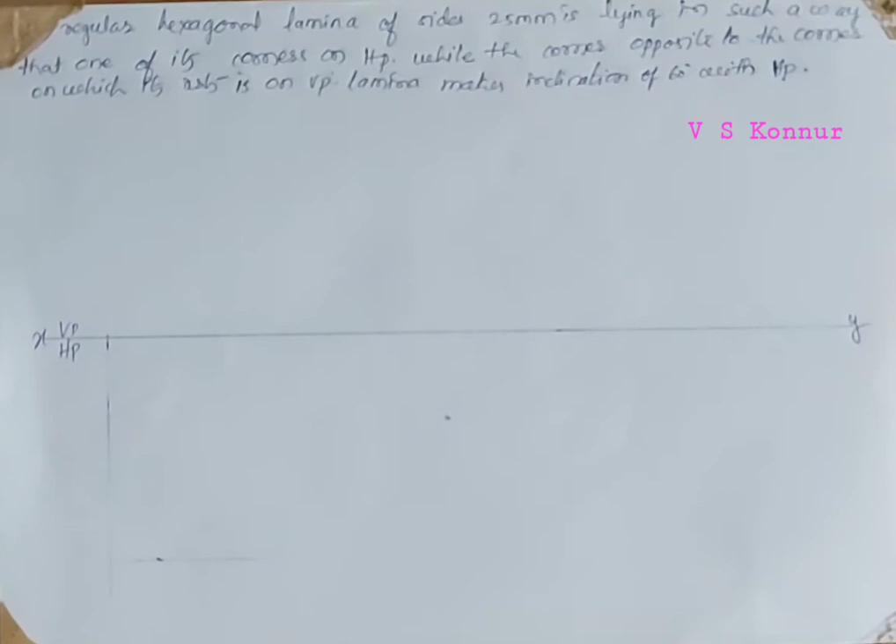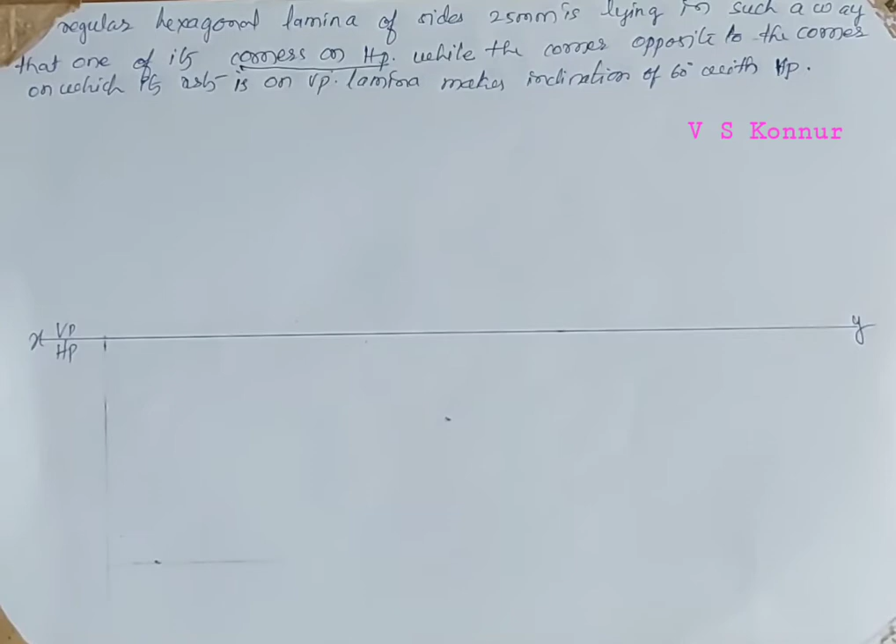Problem number 37. A regular hexagonal lamina of sides 25 mm which is lying in such a way that one of its corners is on HP, while the corner opposite to the corner on which it rests is on VP. The lamina makes an inclination of 60 degrees with HP.

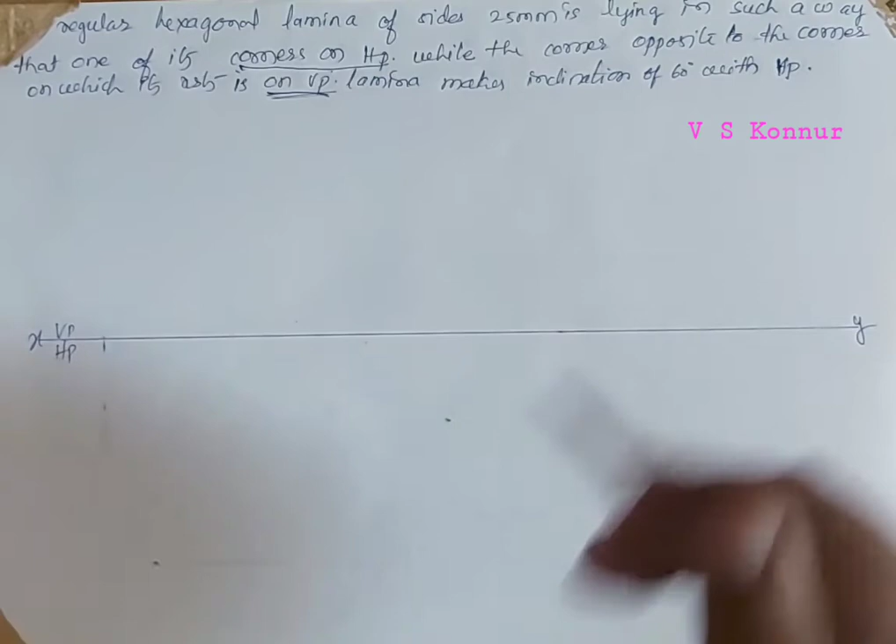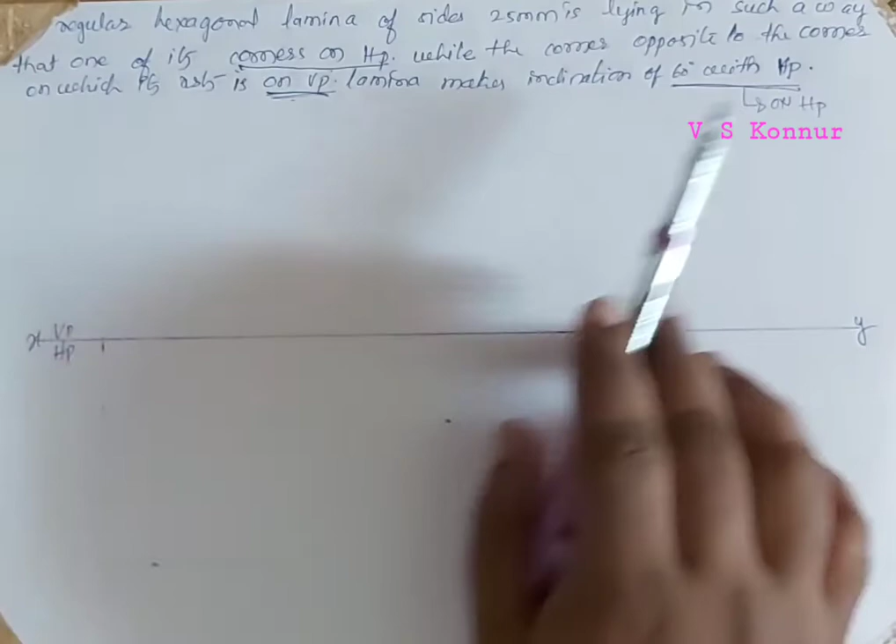It is given that the lamina is inclined at 60 degrees with HP, meaning it is resting on HP. This is very clear because this is given as the second position. The second position is 60 degrees with HP, because the regular hexagonal lamina of side 25 mm is lying such that one of its corners is on HP, meaning it is resting on one of its corners.

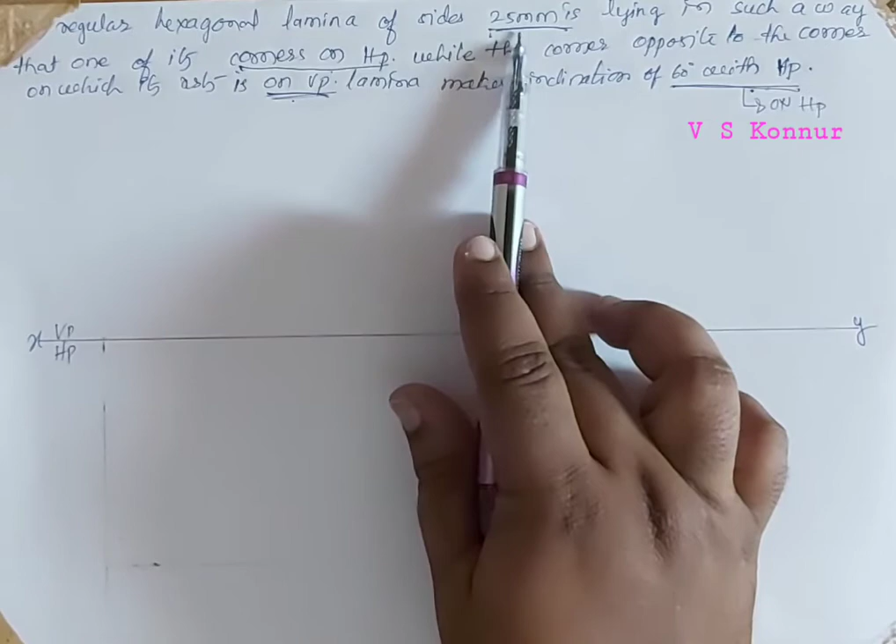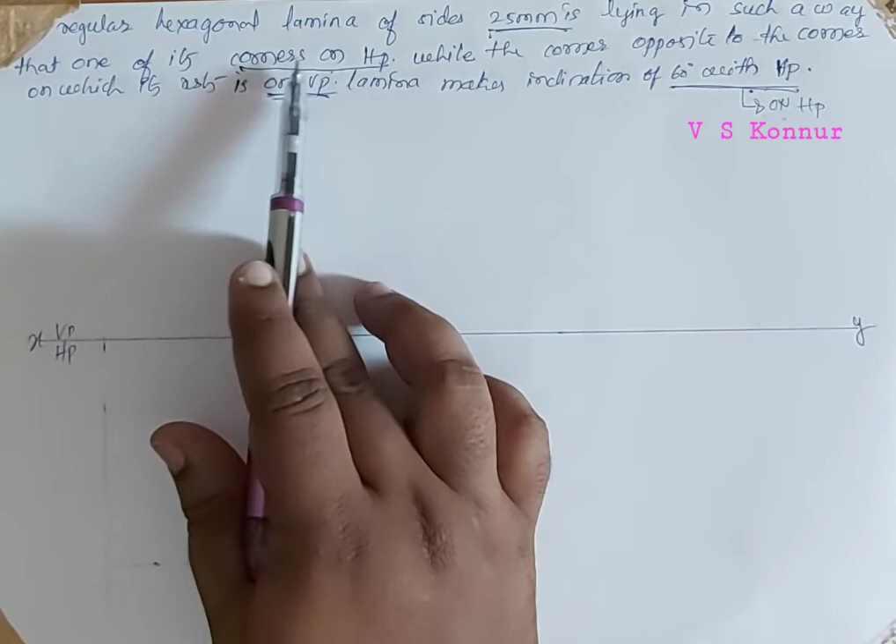Because of that you have to draw the hexagonal lamina of 25 mm side resting on one of its corners. The 25 mm side is there and it is resting on HP because the HP angle is given. The third position is given, where one of its corners touches VP, so it is resting on a corner, which is very clear. Depending upon the corner on HP, it is resting on one of its corners. The corner should be on the left side of the XY line.

So we will construct a hexagonal lamina of 25 mm side resting on one of its corners. We'll take the distance of 25 mm side.

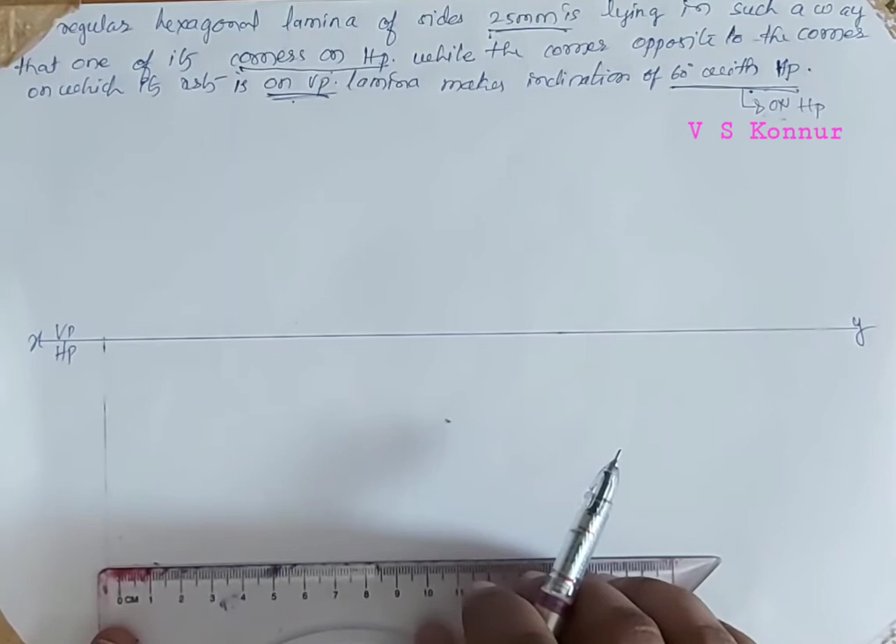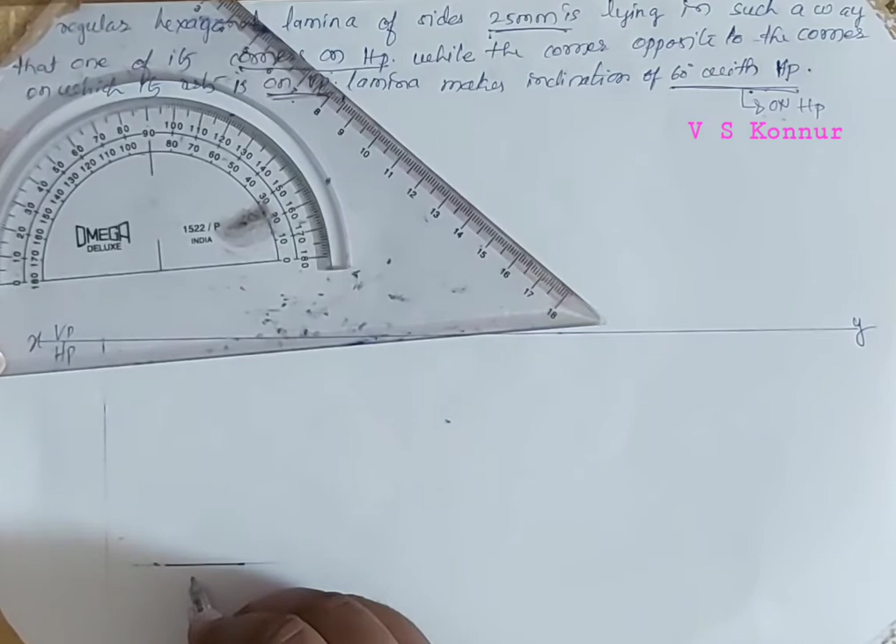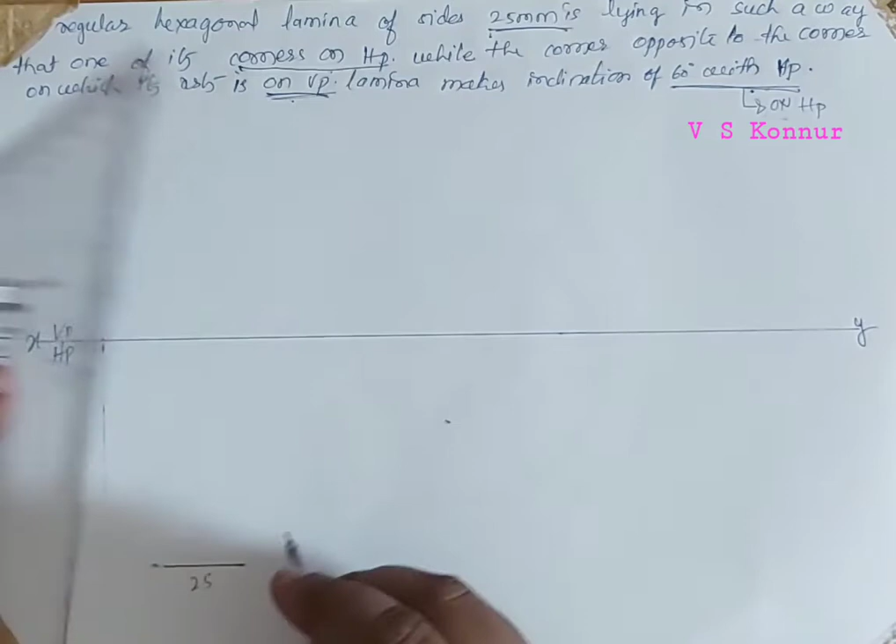Then draw 90 degree lines from these points, this point and this point, which is the 25 mm side. We'll take 90 degrees from these two points, and from this point also 90 degrees. We'll extend these lines till required, but don't draw completely, only till required.

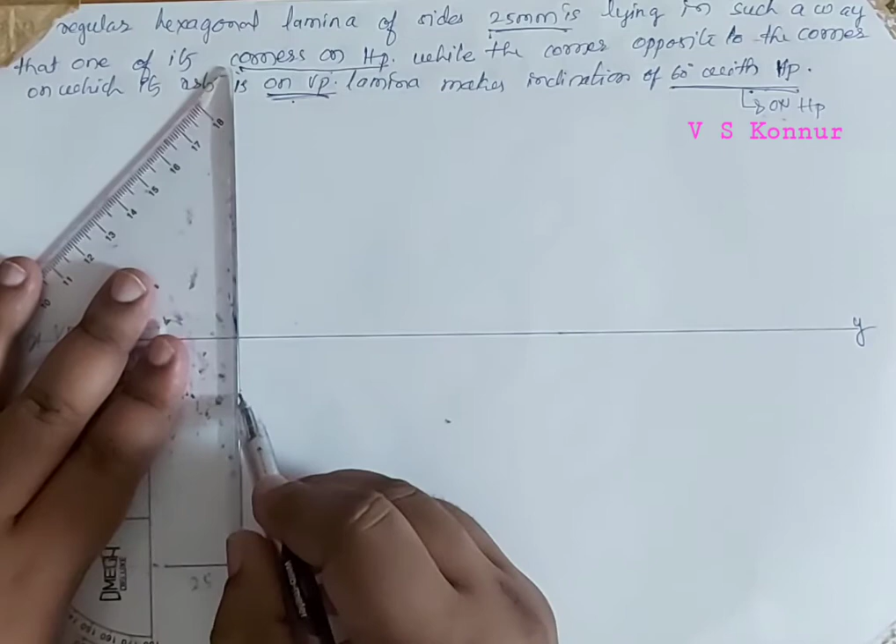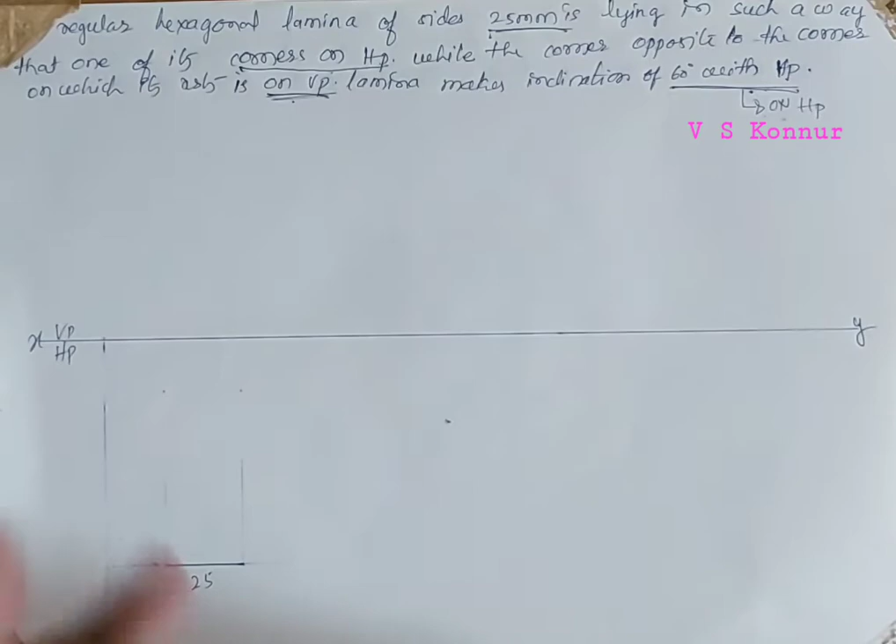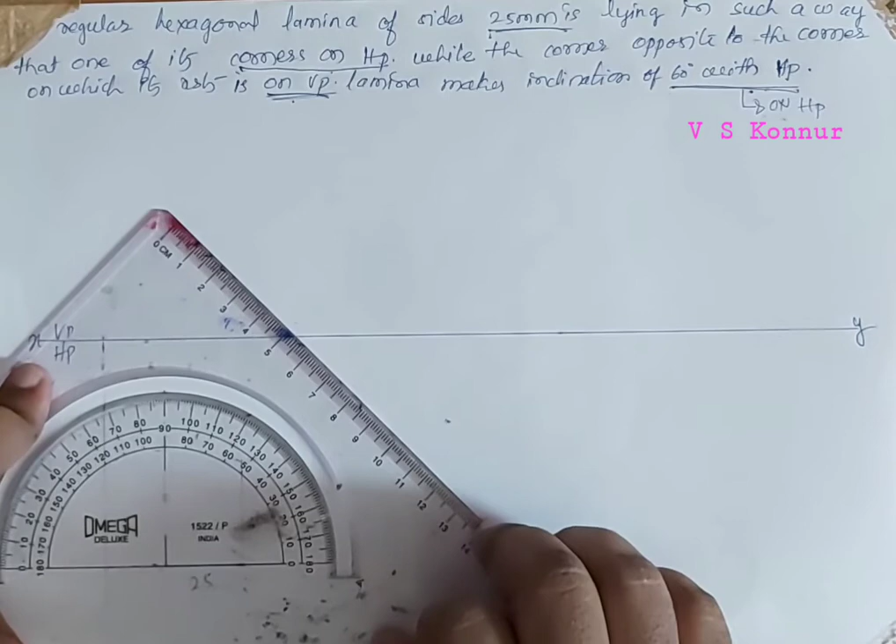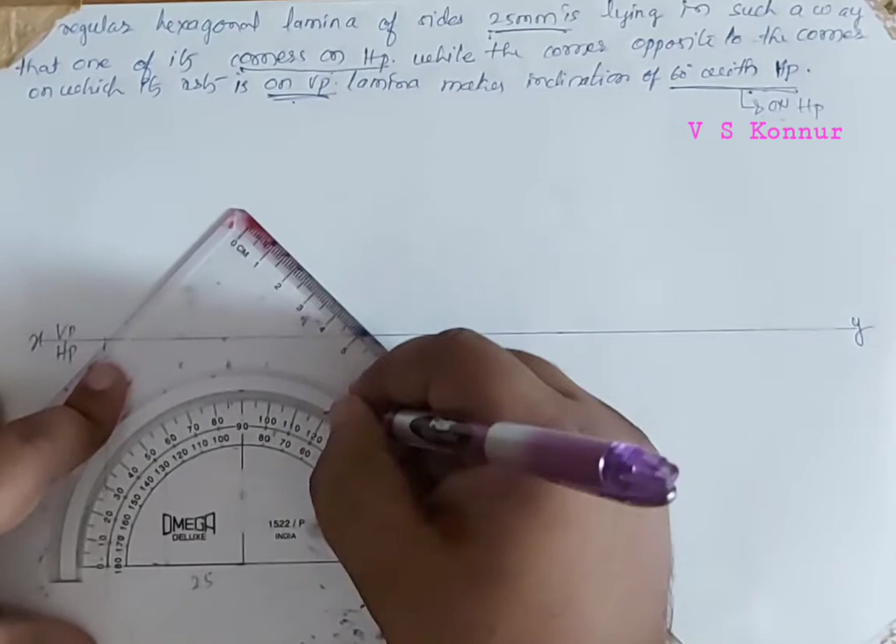Then take an angle of 120 degrees from this point. So 120 degrees, and from this point also we take 120 degrees clockwise, and then extend these 120 degree lines till around 25 on either side.

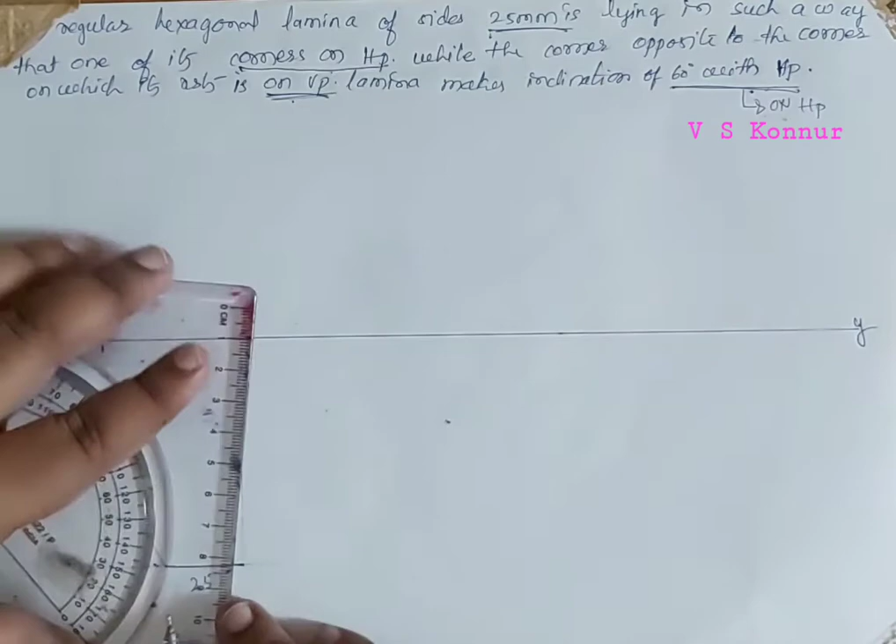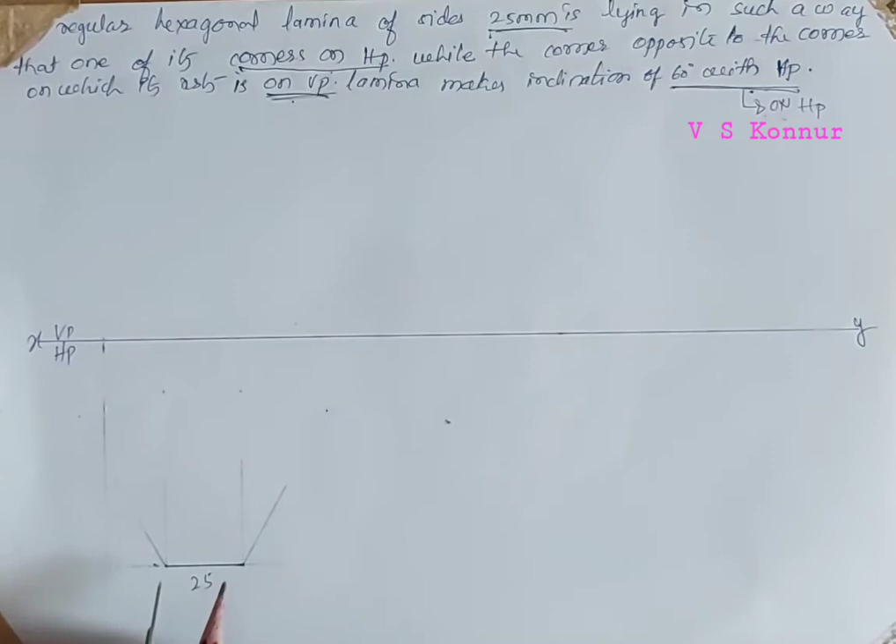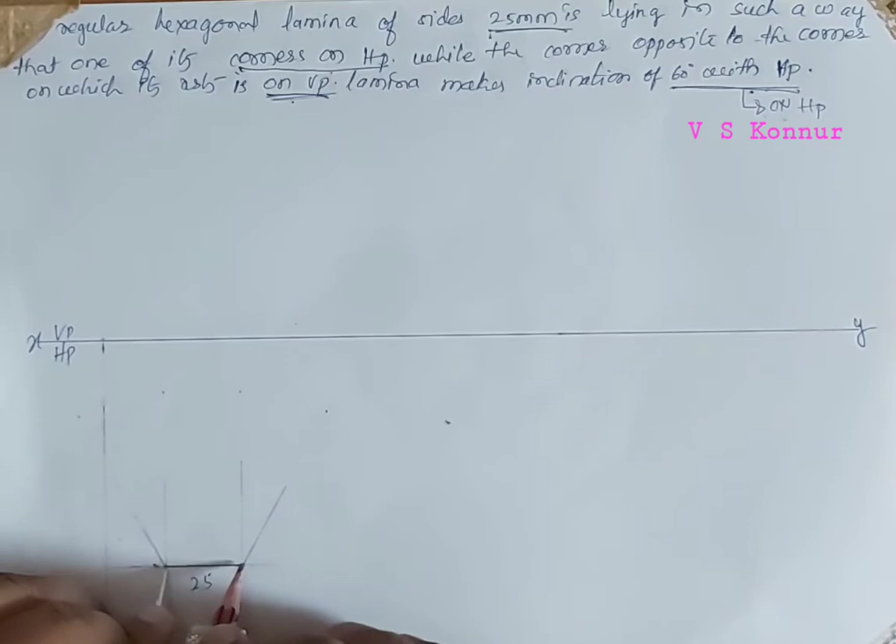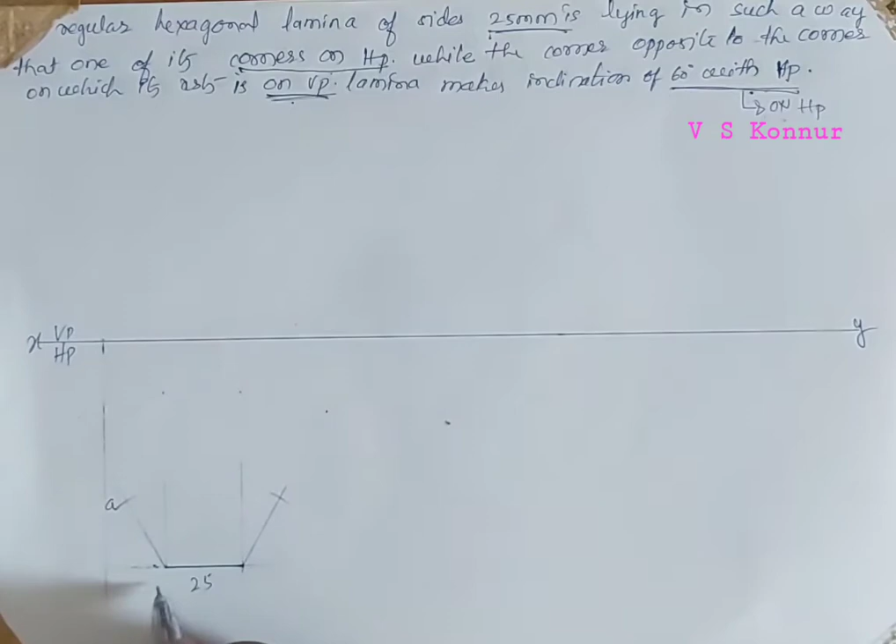Don't extend completely, only till around 25, and then take 25 mm distance from the divider and cut on either side. So we got point A here, point B, point C, point D.

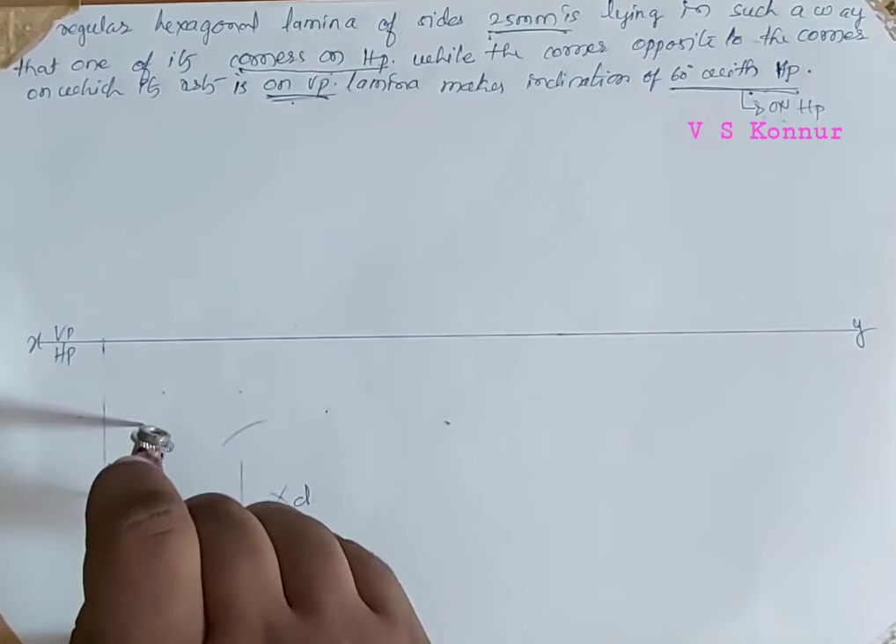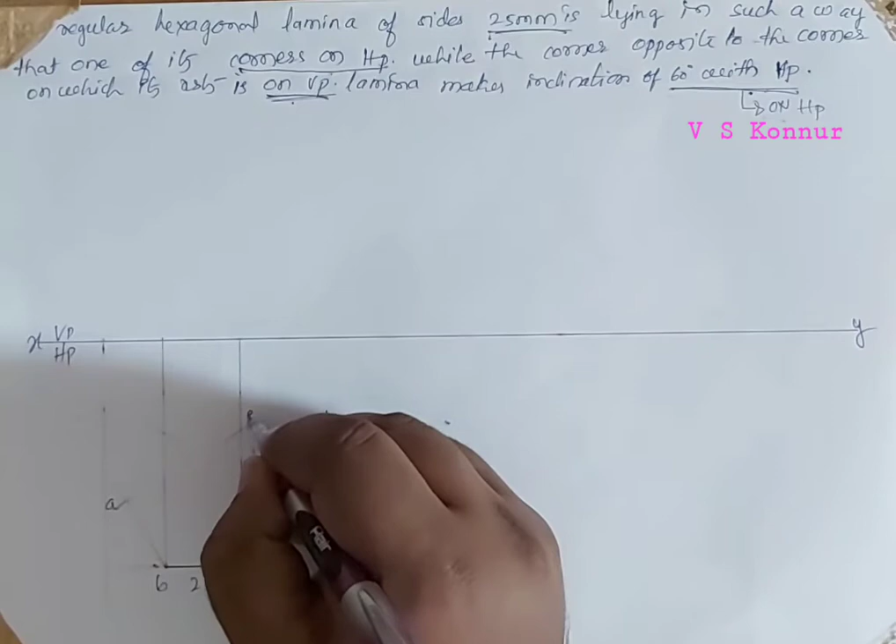Once again with the help of 25 mm we will draw an arc here, and from this point here, so to extend we will get this 90 degree line. We will extend it completely because we need it for the projector also. So we got point E, point F. Now we'll join all these points.

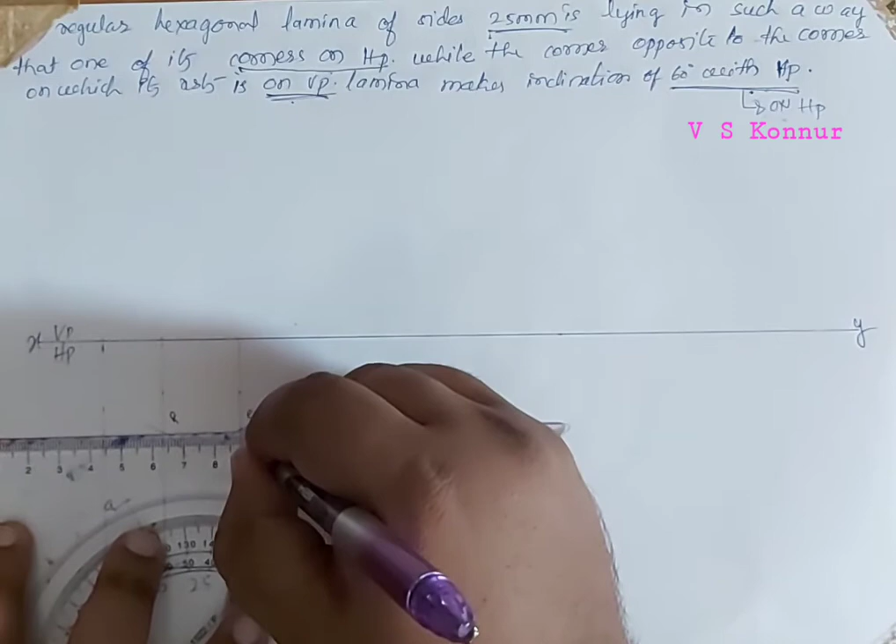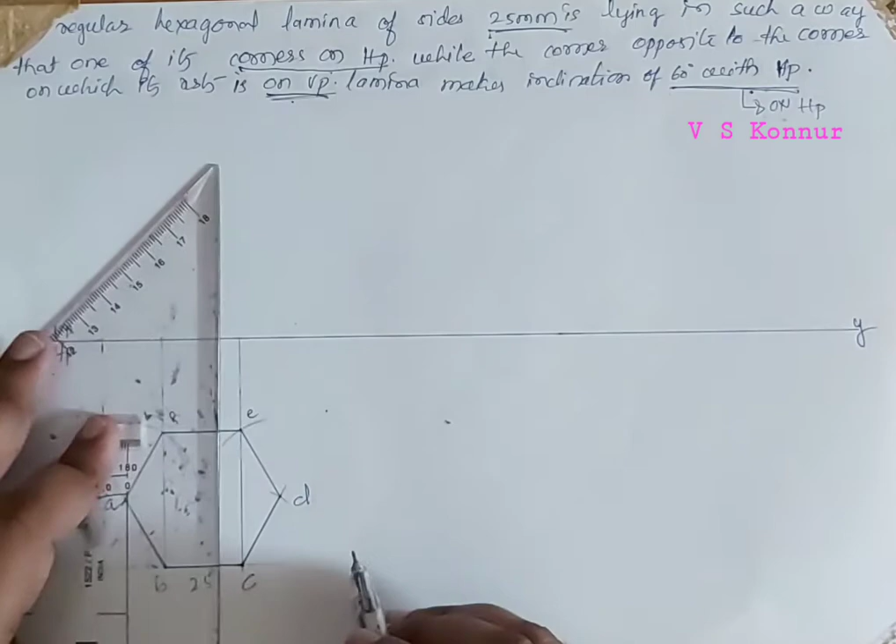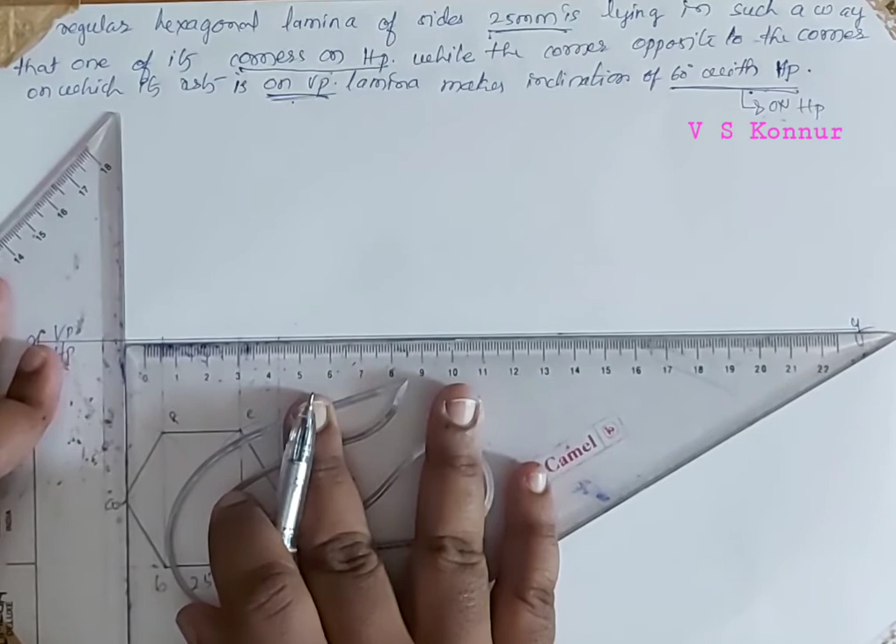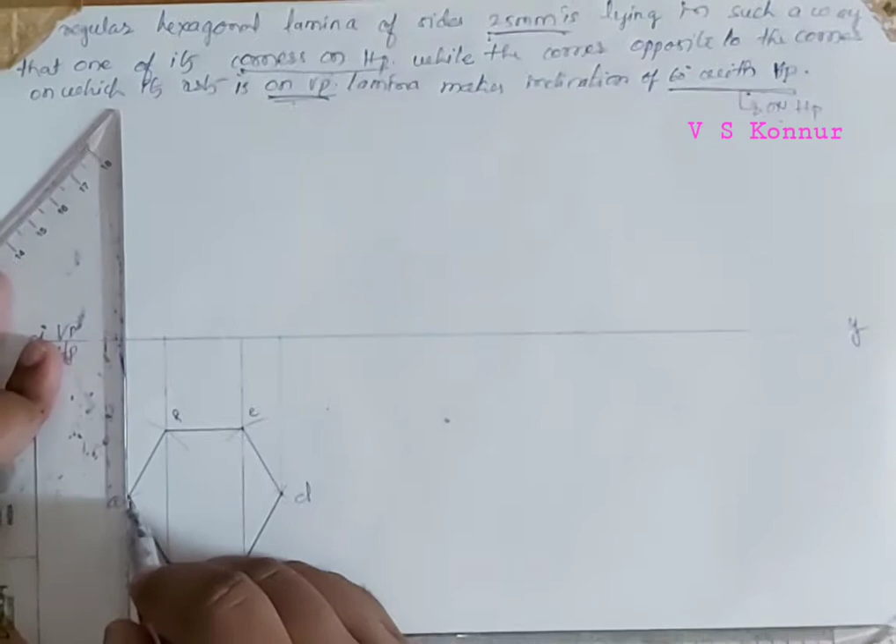Now this is resting on one of its corners, so we will draw the projector from all the points. Now we'll draw the projector from A. So we got the lamina on the XY line by projecting all the points.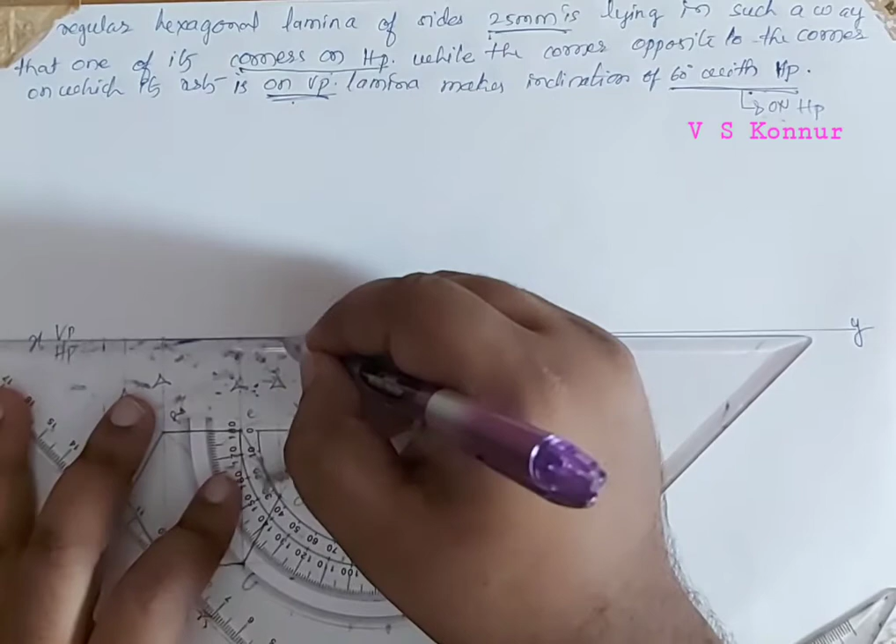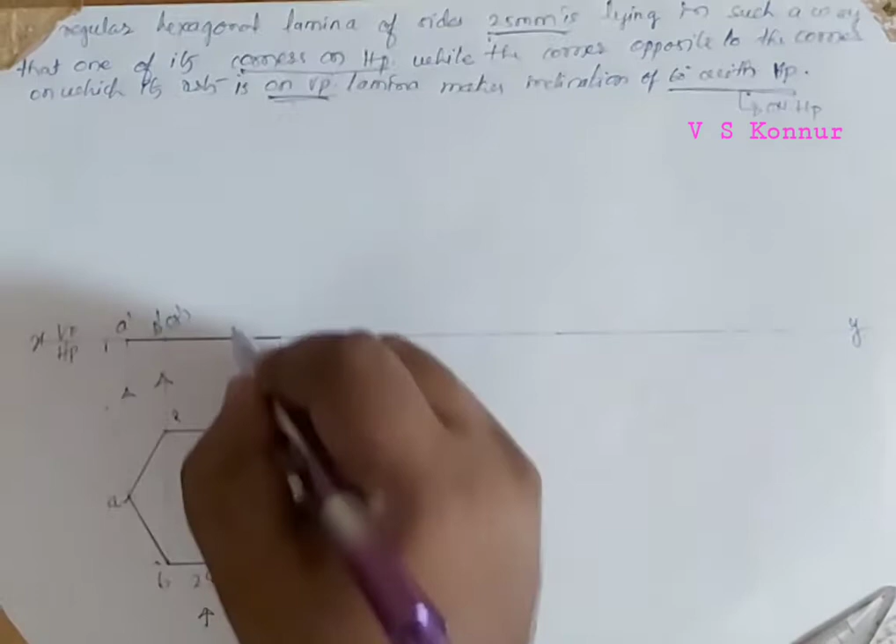When you are viewing from this side, we'll darken this lamina first. A dash and B dash are visible, F dash is not visible, C dash is visible, E dash is not visible. This is the first position, which is resting on one of its corners.

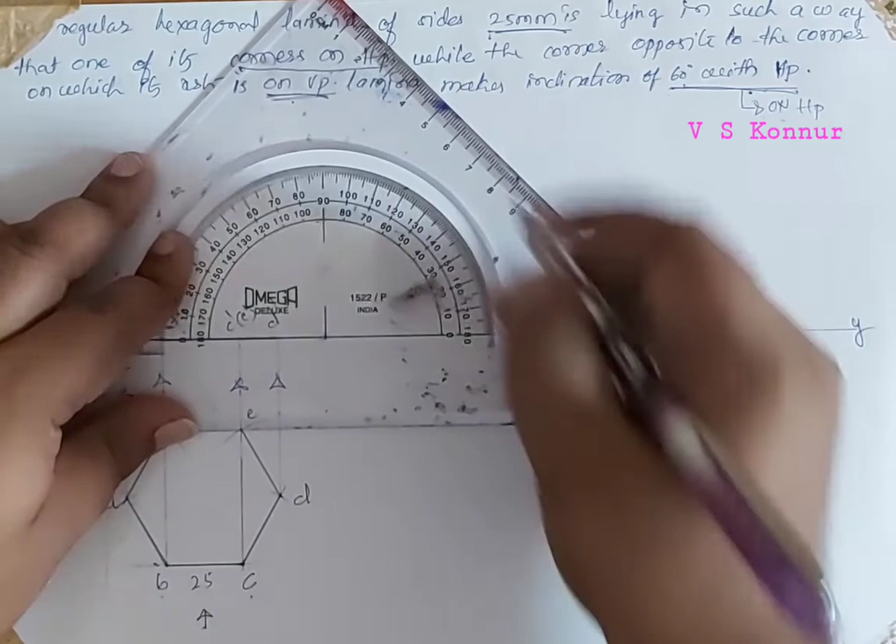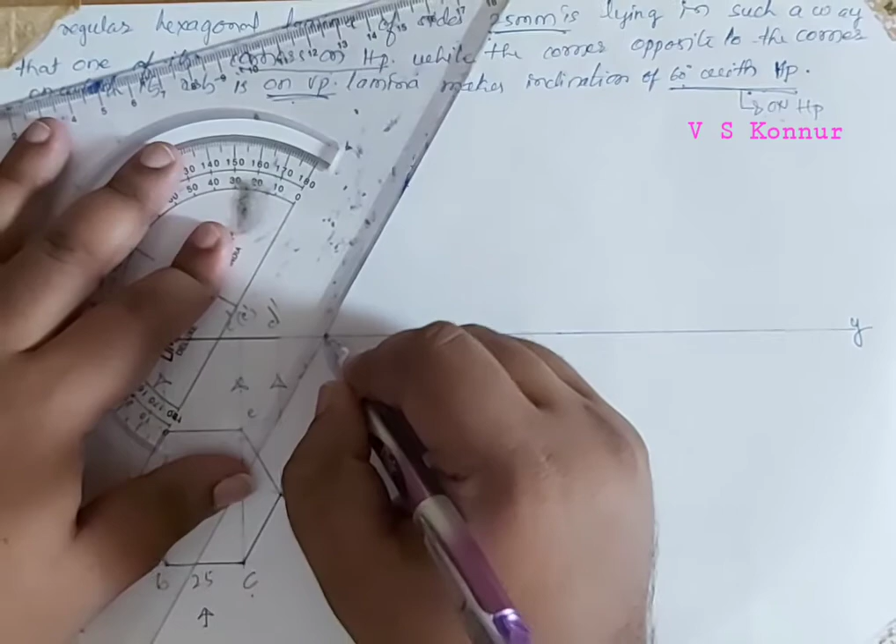Now it is at an inclined angle of 60 degrees with HP, so it will be drawn on VP. We'll mark one point here and then take a 60 degree angle. We'll join these two points with a thin line, and this angle is 60 degrees.

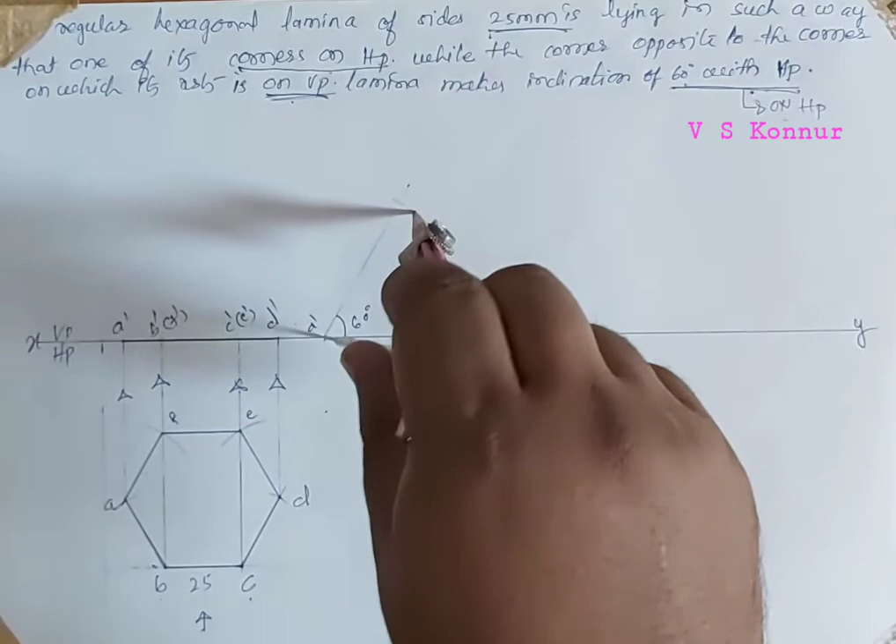Now this point is A dash. We'll cut all other points on that line. So we'll take the complete distance first, and by keeping at point A, we'll cut this line to get point D dash here, and then take the distance.

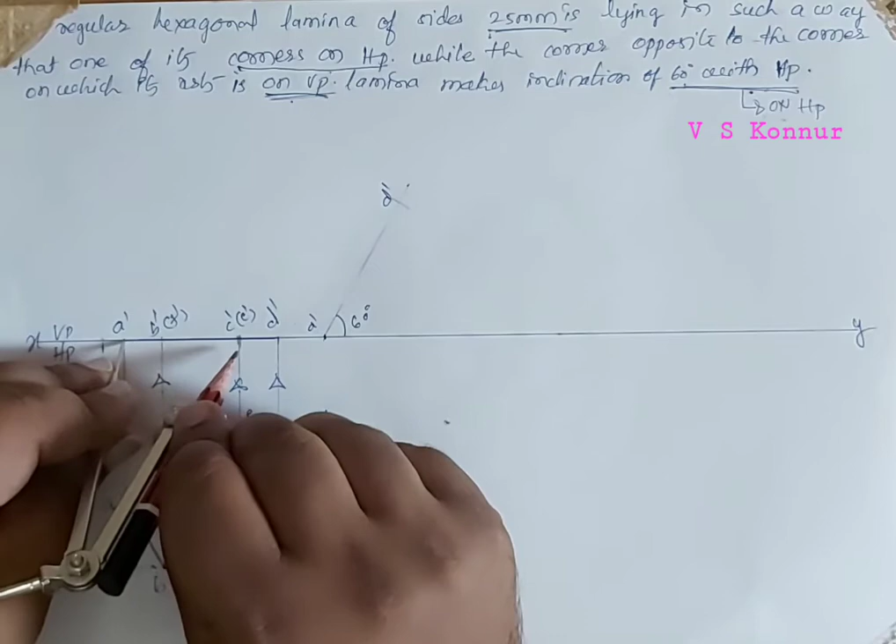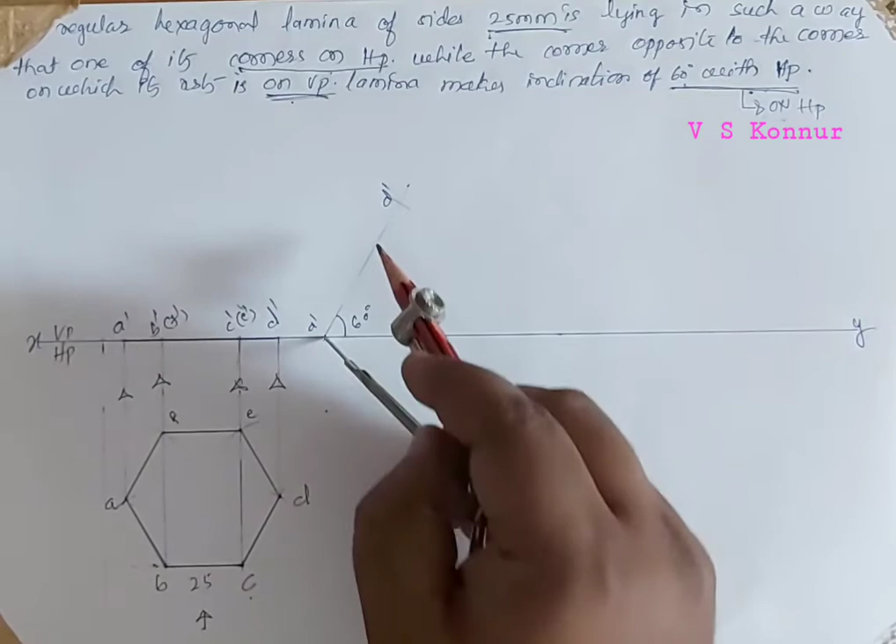So from A dash to C dash, E dash, we cut from point A and also cut from point D, which has the same length. So we will get B dash, F dash, C dash, E dash. Now all the points we have.

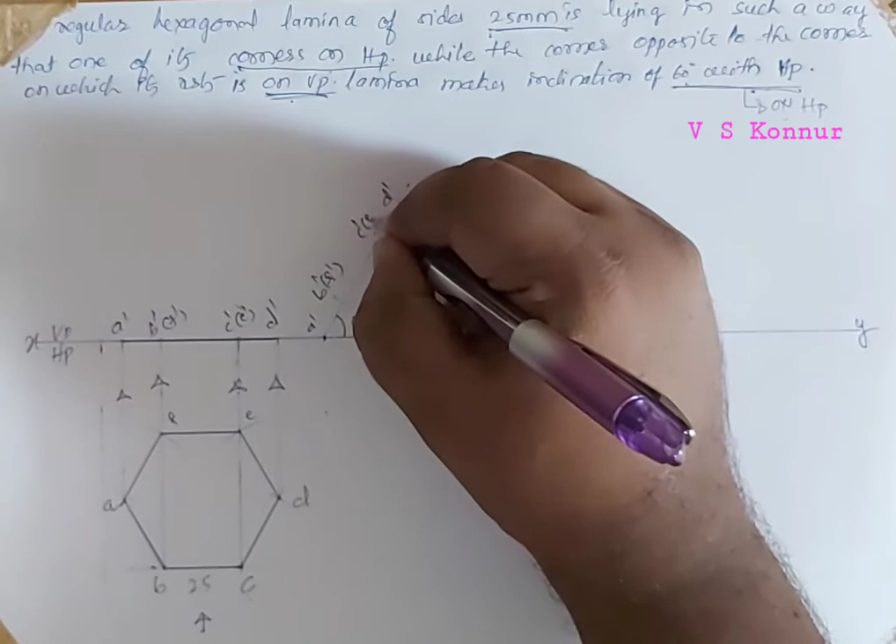Now we'll darken that point. All the points which are covered, the line will be darkened. This is called the lamina. Now the lamina has been darkened, and now we'll draw the projector from all the points.

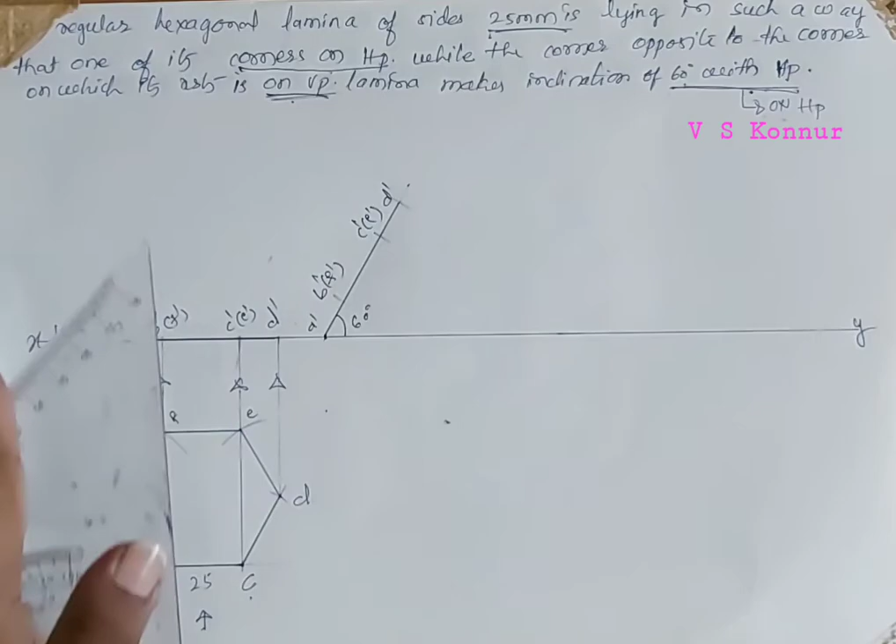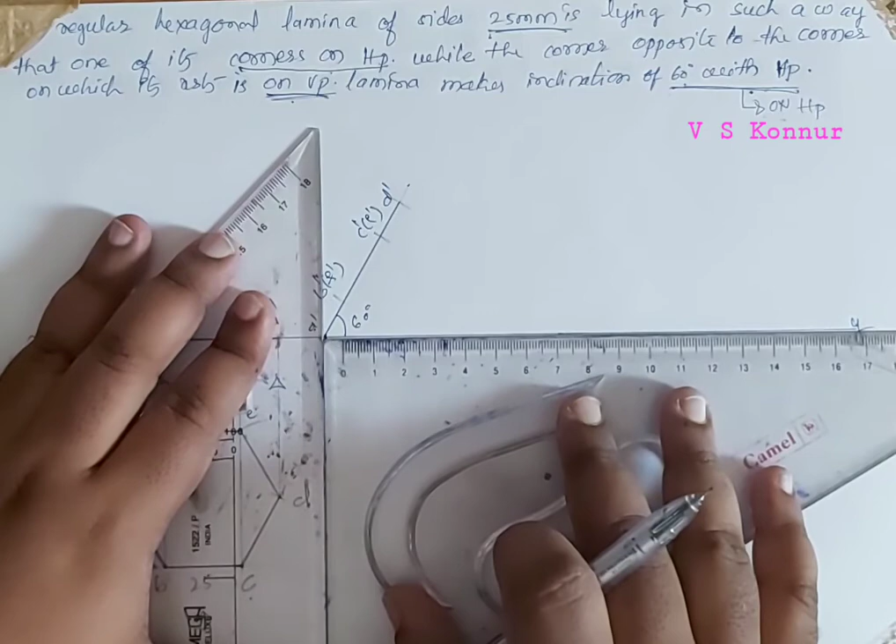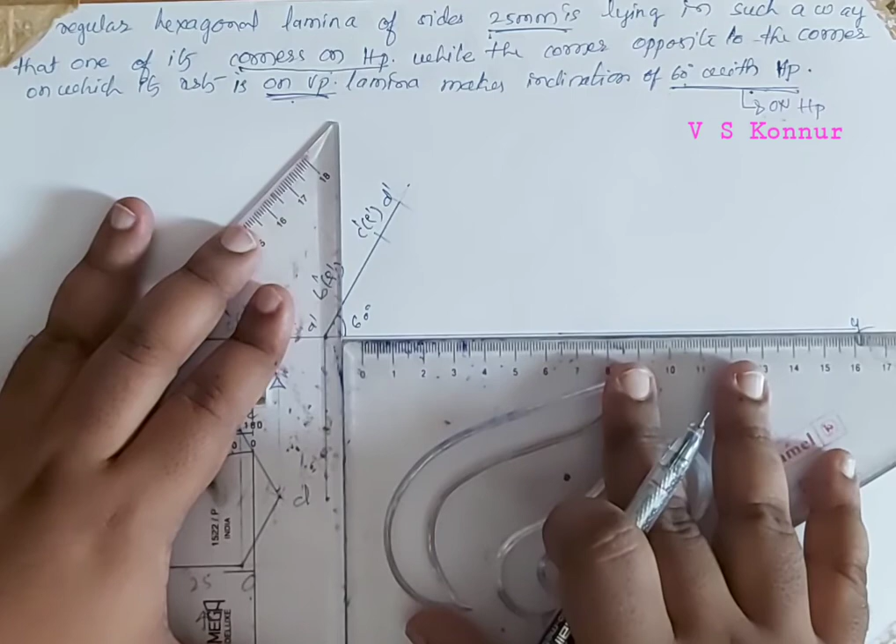This is A point, I will draw till A. Then B and F. Then I will draw CE. Then D point.

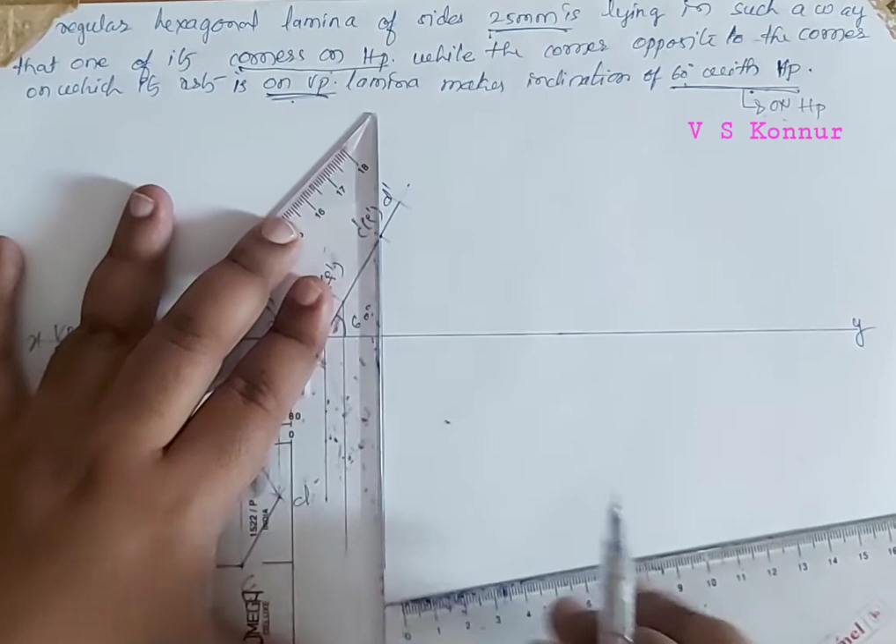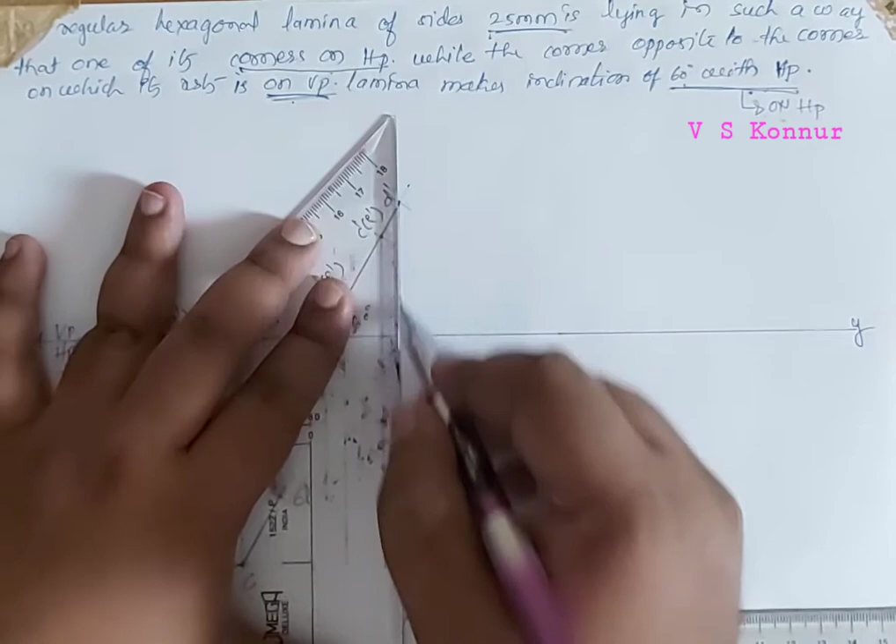Use arrow mark for that. How these projectors have been drawn will be indicated with help of this. Now we'll draw projectors from all these.

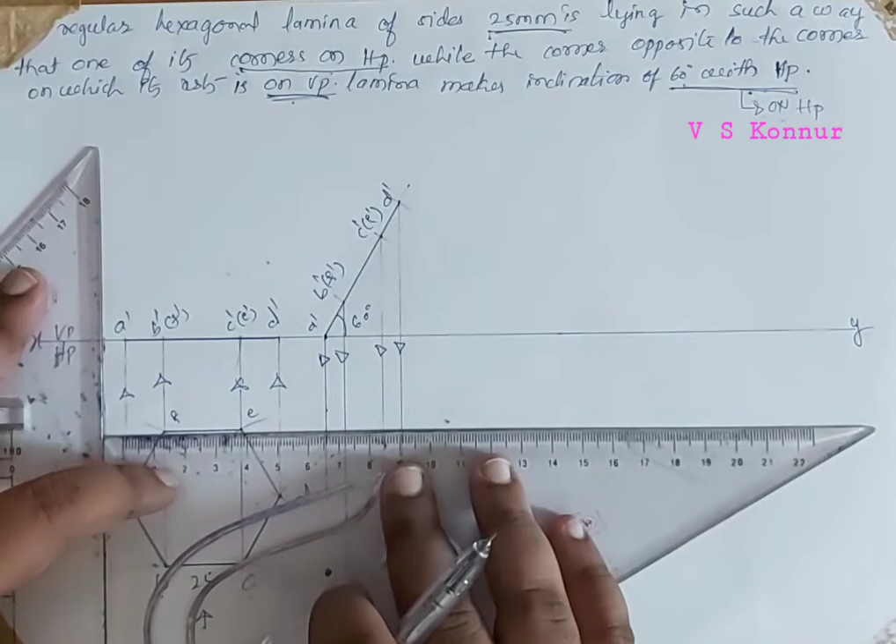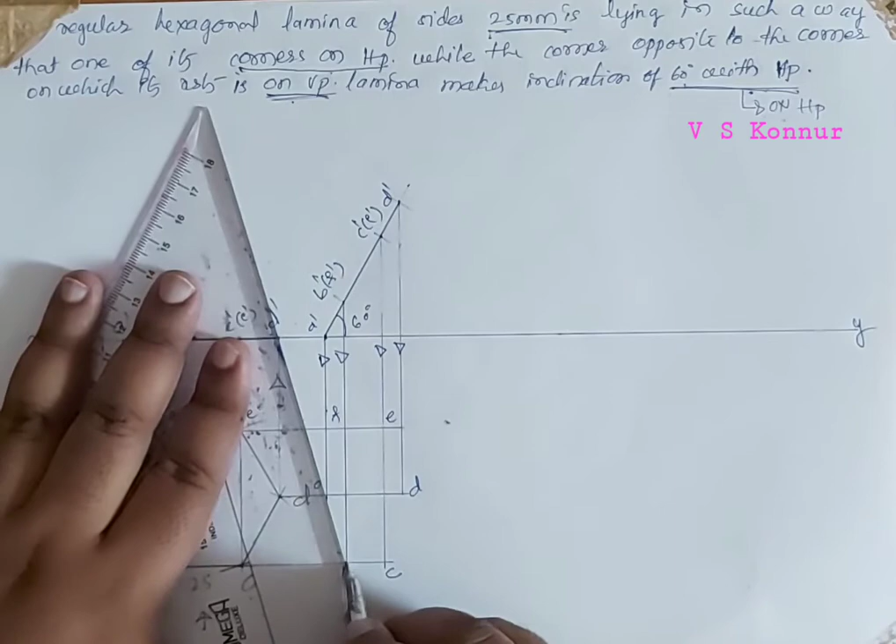So we got all the points. A is joining with A point, B is joining with B, C, D, E, F. Now we got all the points. Just we will join these points with the dark line.

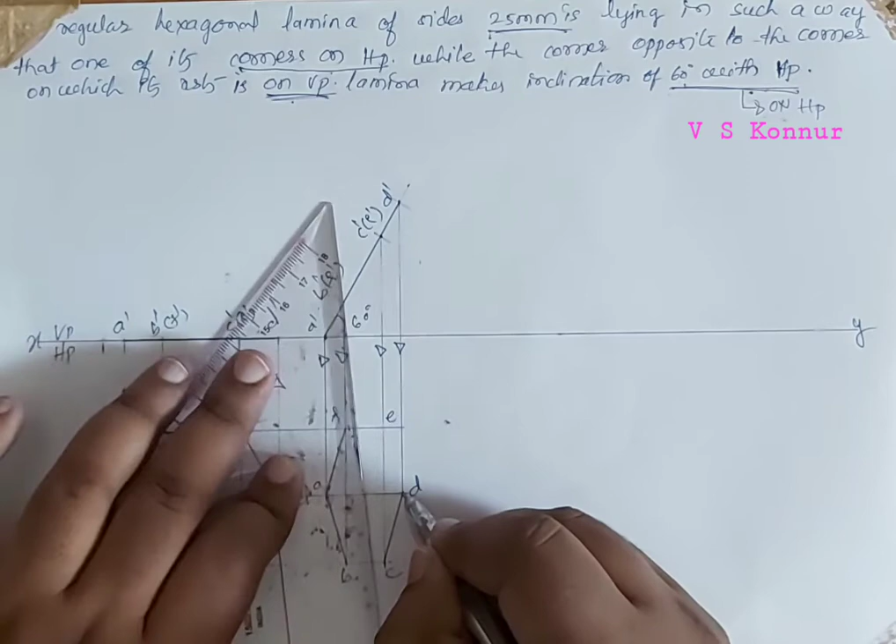So this is how you have to draw the lamina which is inclined at an angle of 60 degrees, and this is how it looks when it is inclined at an angle of 60 degrees.

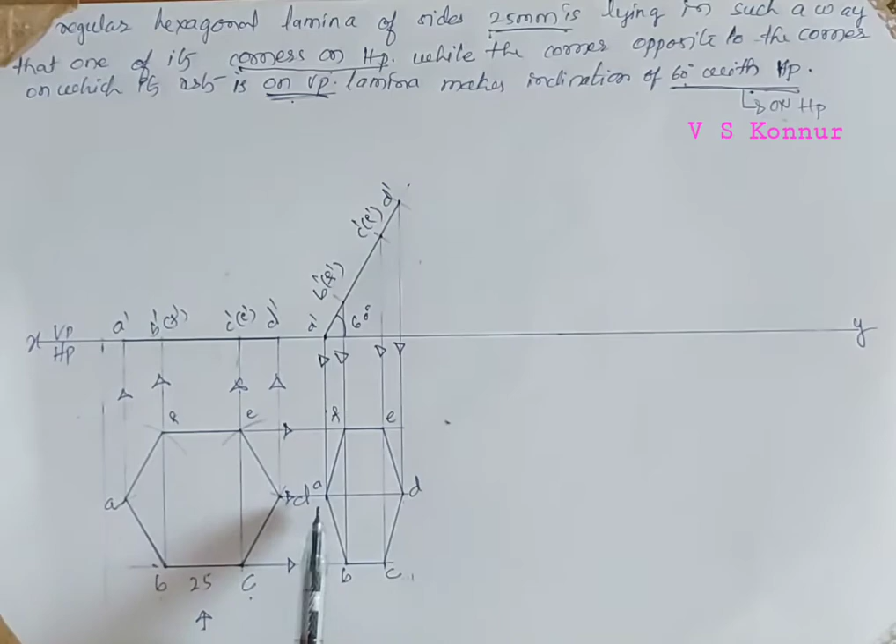Now the third position is this corner touching the VP. This is given while the corner opposite to the corner resting - this is the resting corner, then the opposite corner is this. This is resting on the xy line, so we'll give D point for this.

Now we'll construct this complete hexagon here. Now we'll take the distances. From this point I'll take this distance first for construction purpose. So please remember, this is the easiest way of construction I am explaining.

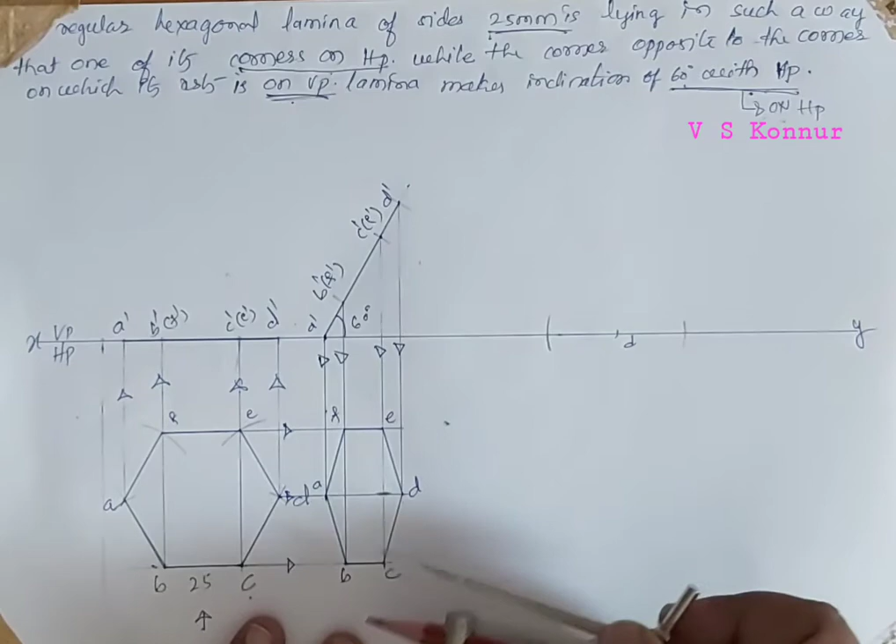Now from D point on either side just draw an arc. Now I have taken the distance of C to this distance, this to this, that is nothing but this D to this distance, D to that distance you have taken.

Now from all the points you have to take 90 degrees. From all these points you have to take 90 degrees. So this is the easiest way of constructing the third position. So 90 degrees you have to take from all the points, from D point also you have to take 90 degrees.

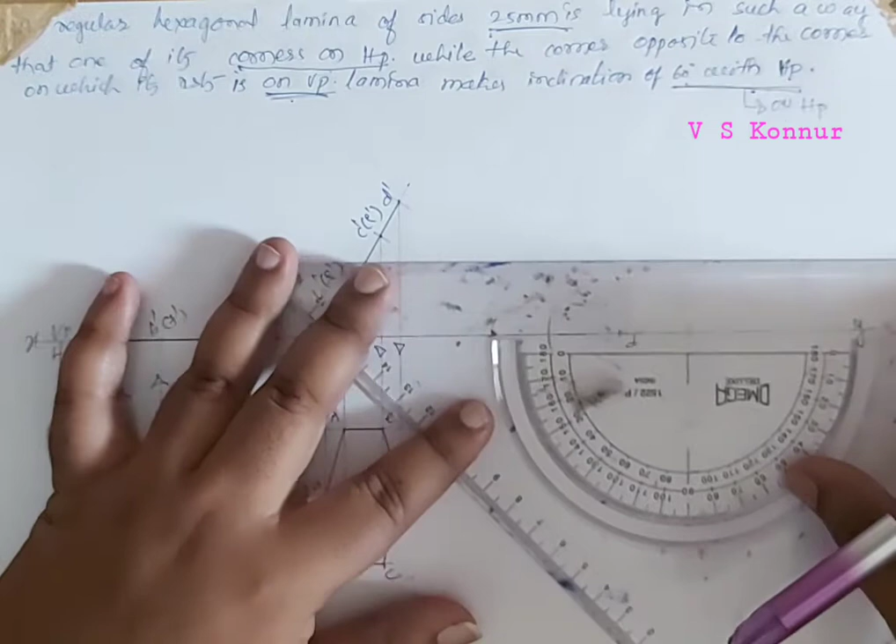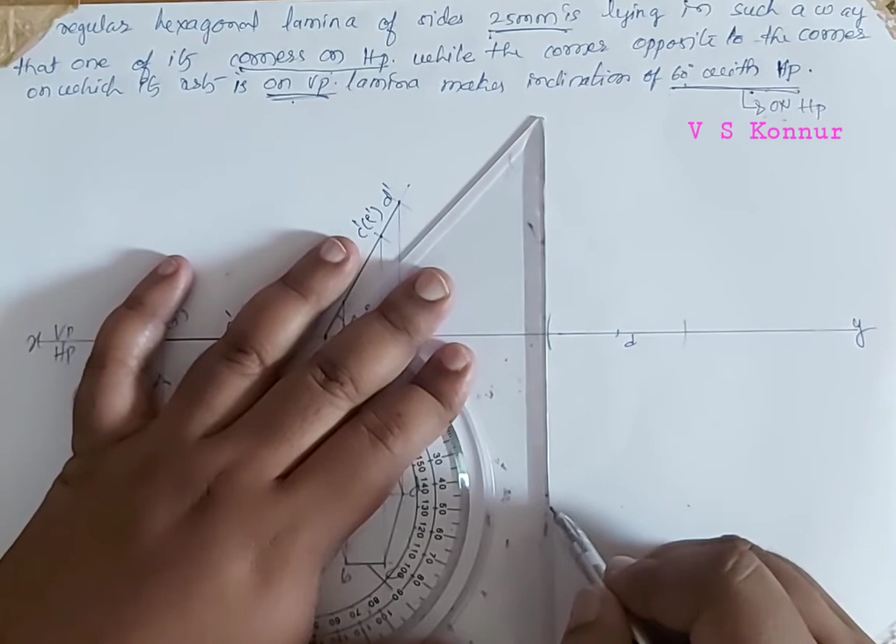Next from this point. Now we'll extend with a thin line. How much we need, only that much I will extend. With a thin line I am extending just for construction purpose. And then this 90 degrees.

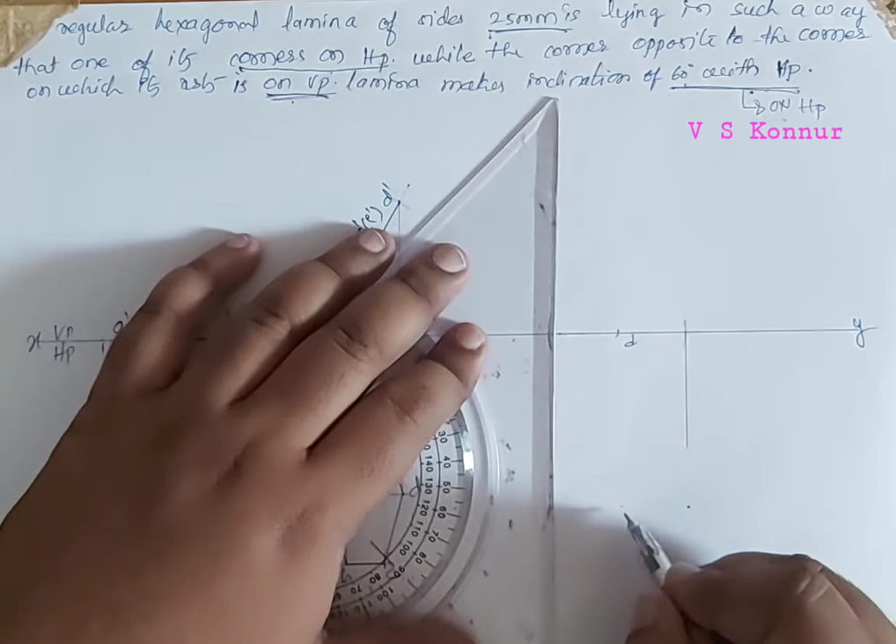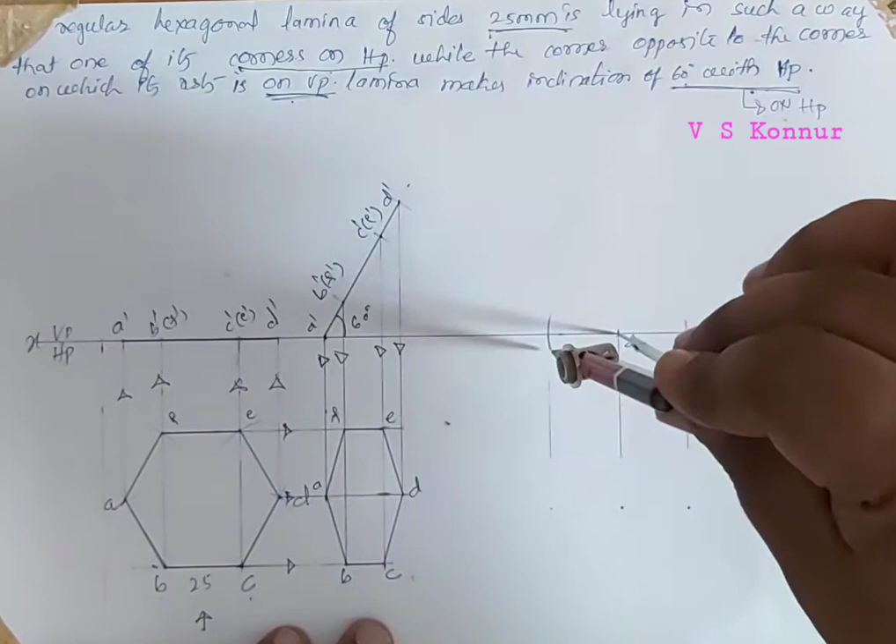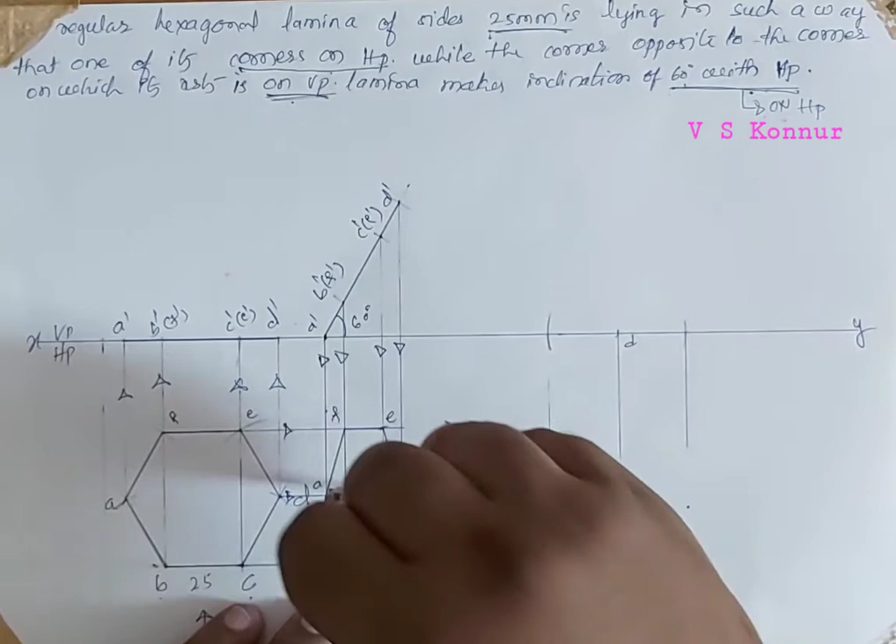Now what I will do, we'll take the distance of D to E. So D to E, then I will cut these 90 degree lines. Now A to D I will take. We will cut, we will get A to D directly here. So we got this point as A, that point as D.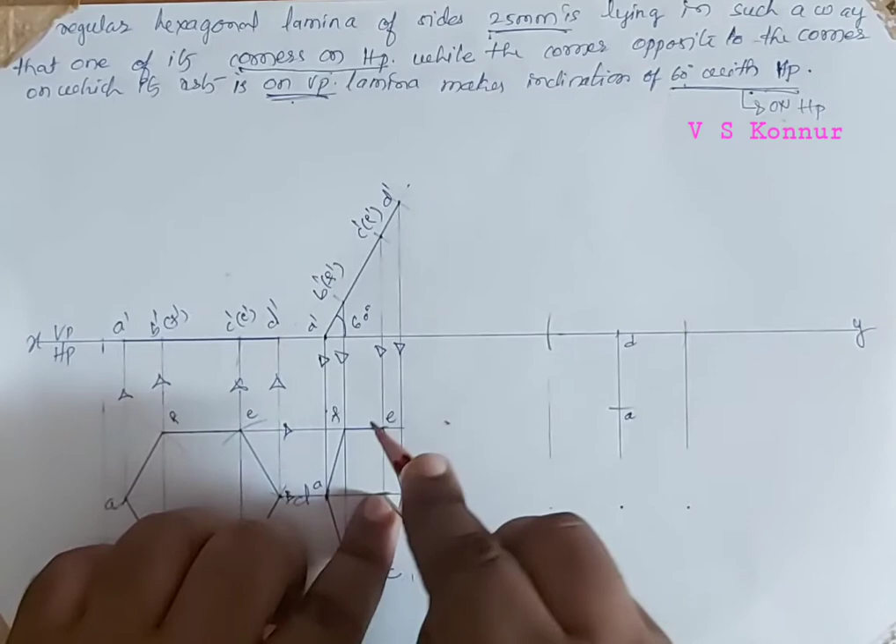Now we need the other 2 points, so for that, by cutting on either side we got the points. Now we'll join these points with this 90 degree line. So this point and this point.

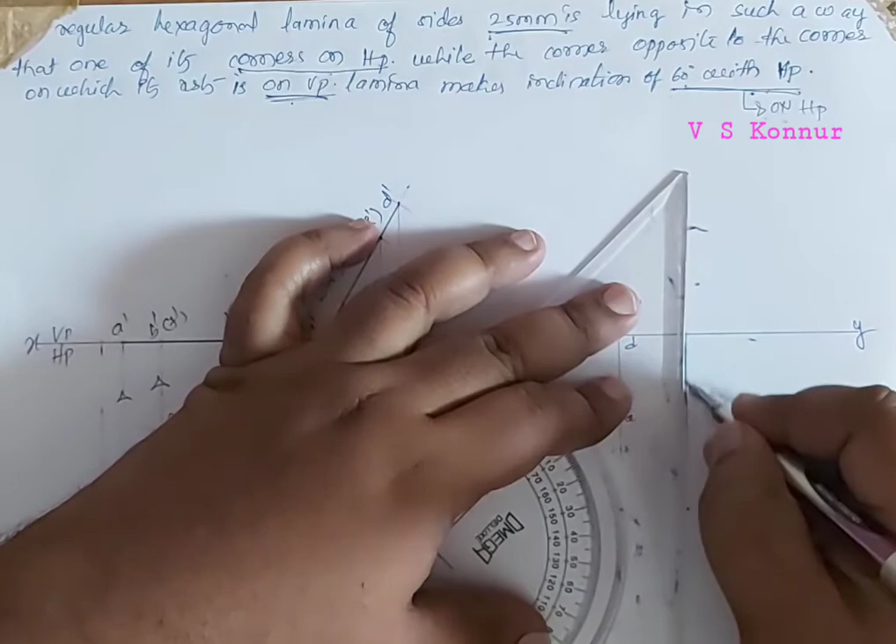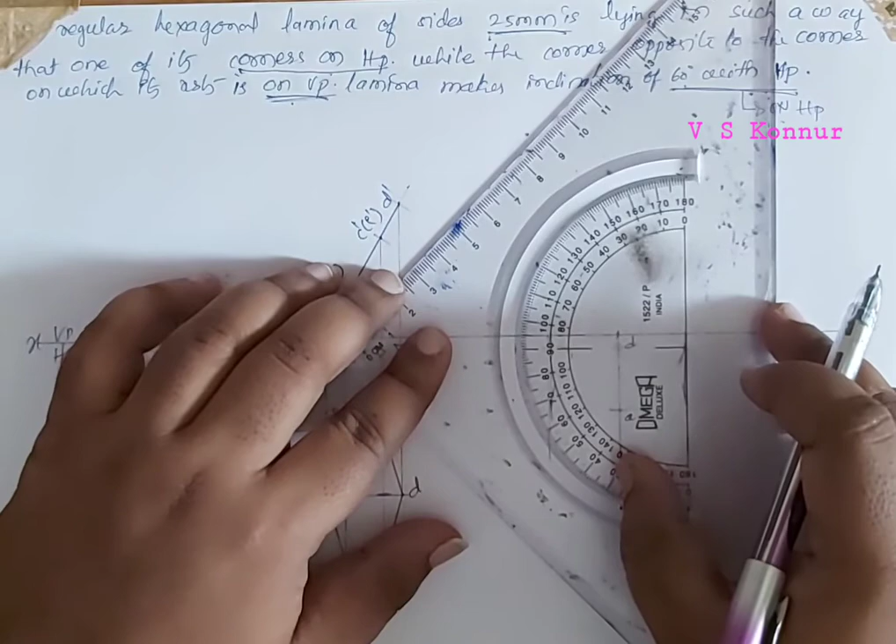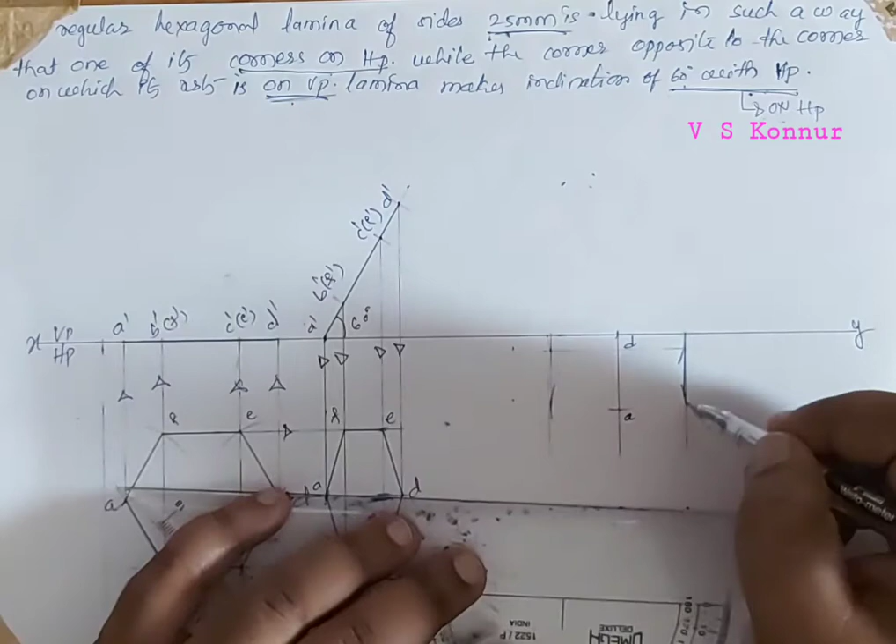From this, if you take 90 degrees you will get another point. So we'll take 90 degrees from this side, from this point. So 90 degrees, and from this point, 90 degrees. So we'll get another 2 points in opposite edges. So another 2 points we'll get here. So we'll join this point also, and we'll join these 2 points.

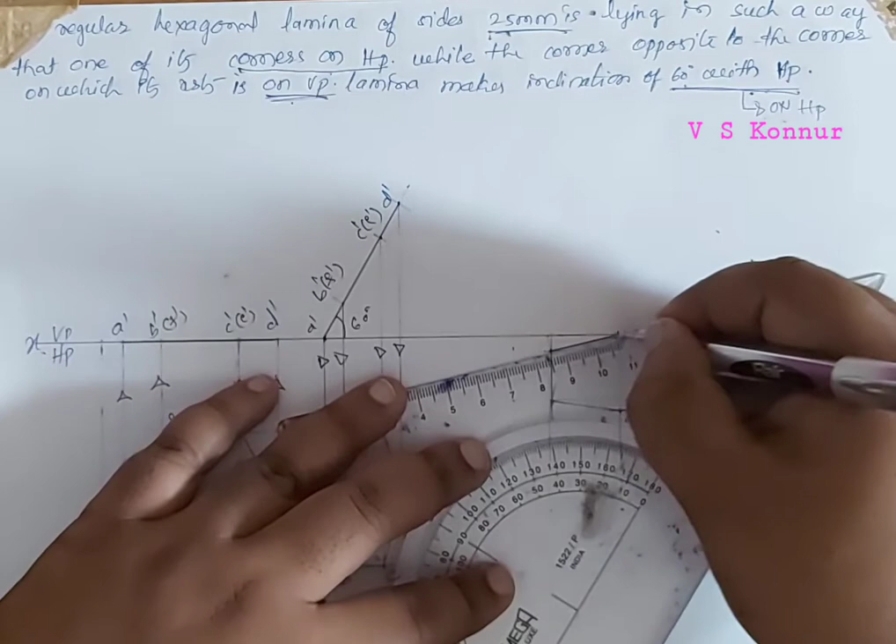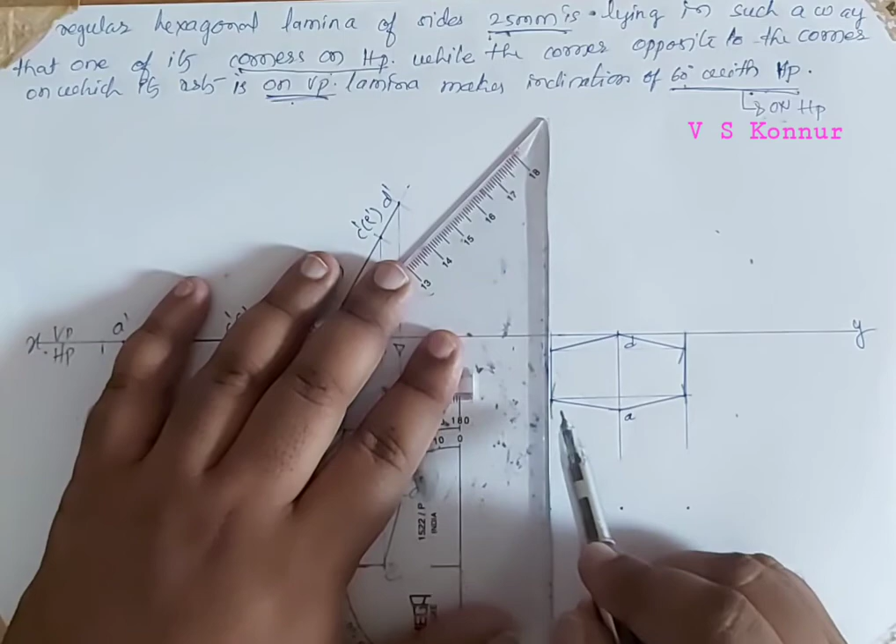Now this complete hexagon has been transferred at this place. Now we'll draw the projectors. From all the points we have to draw the projectors.

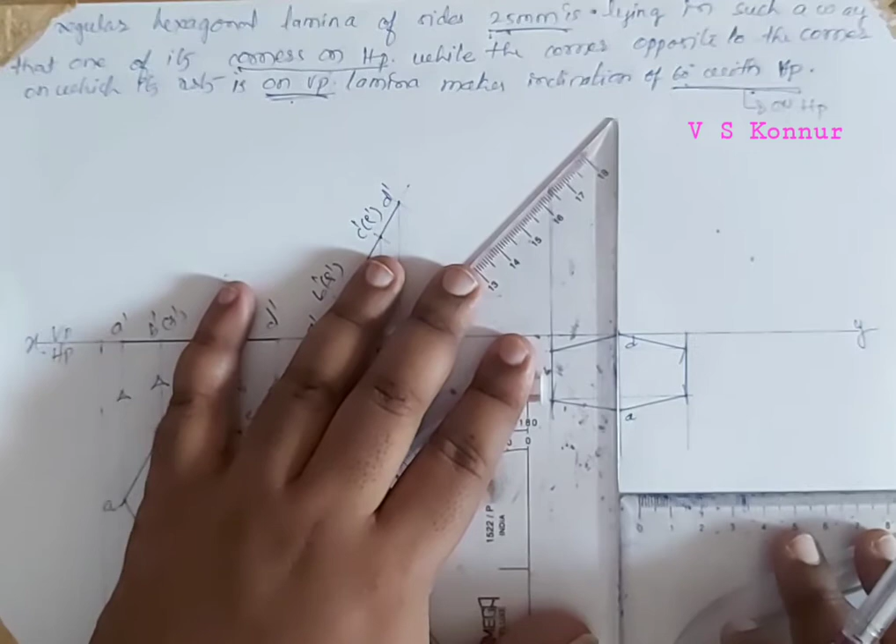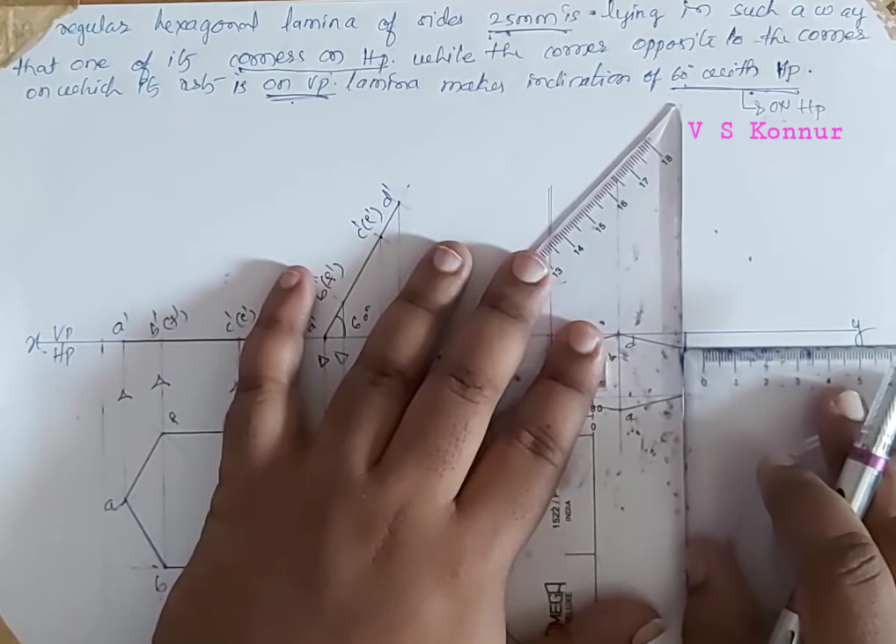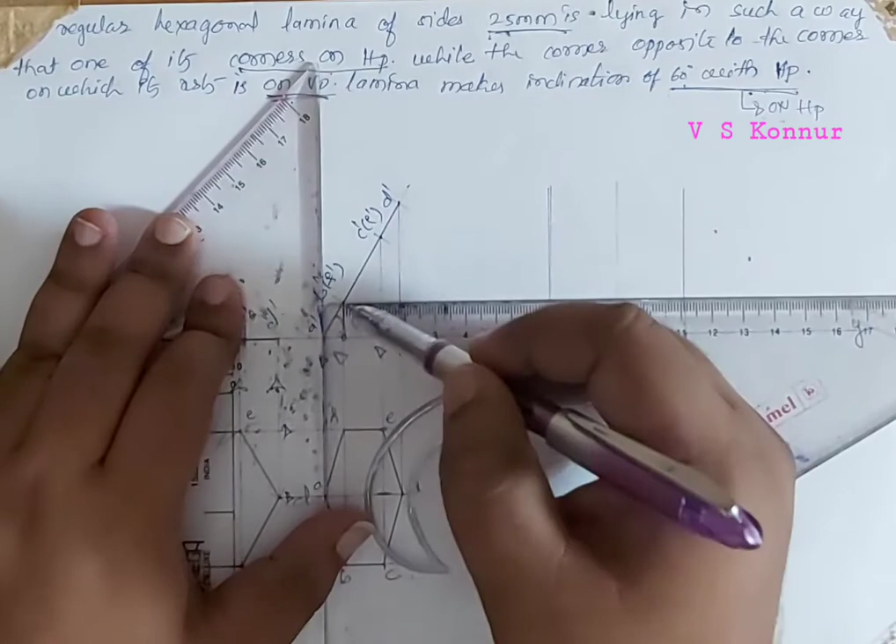And in horizontal, from CE, then D, now we'll get all the points. So D and D dash are joining each other here. So here it is A dash point.

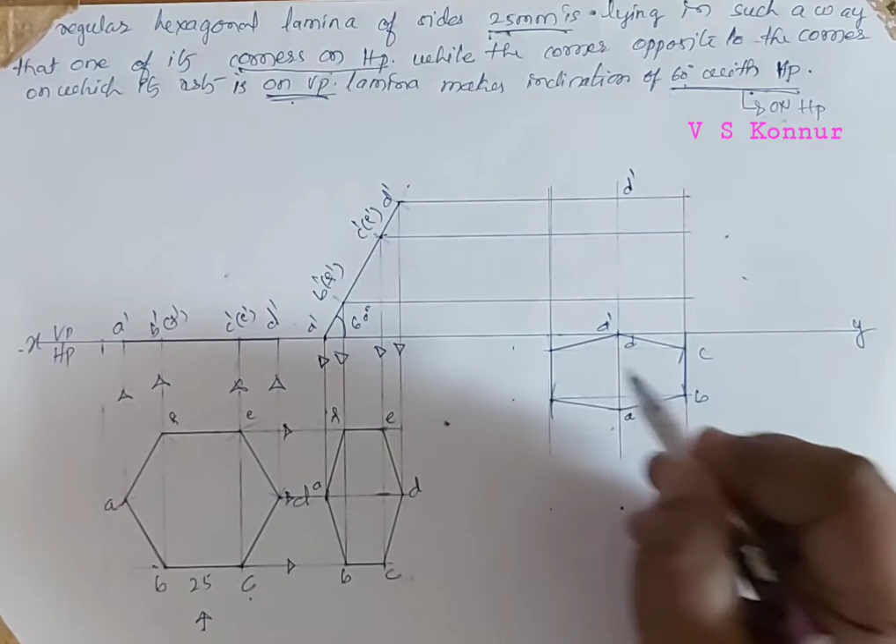Then so this is A, B, C, D, E and F. So B and C's are joining here. This is C dash, this is B dash, this is E dash, this is F dash.

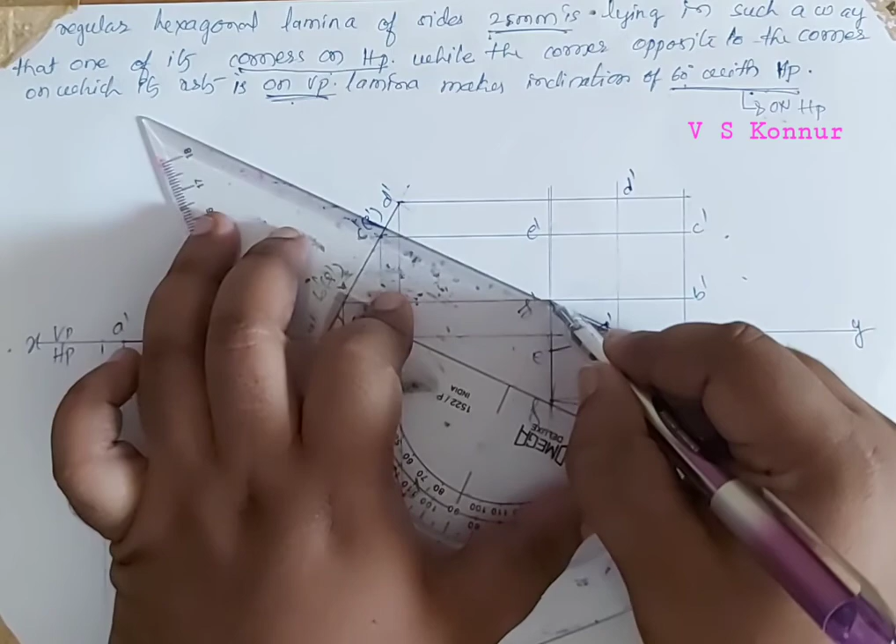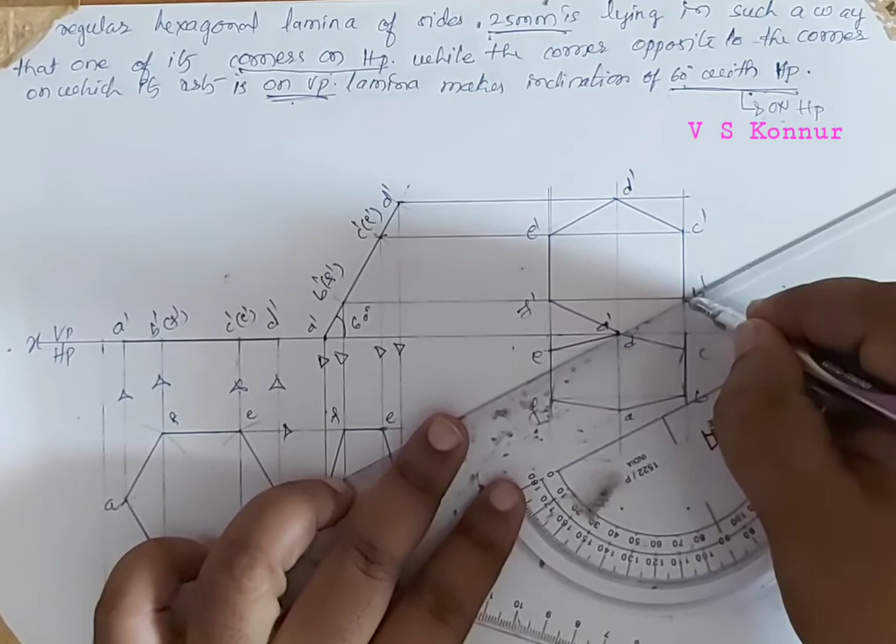Now we'll join all the points: A to F, F to E, next B to C, next from C to D, next D to E, one more point B to A. This is how to construct when the edge is resting, that point corner is resting on horizontal, that is the XY line.